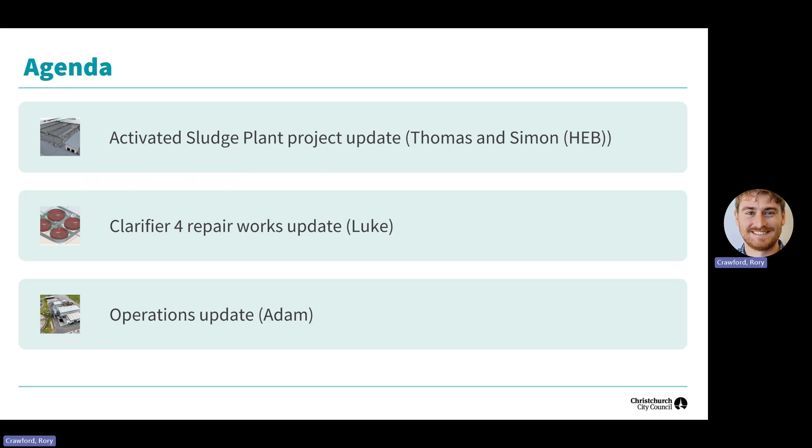Let's start. Today's agenda: I will present about the Activated Sludge Plant, then Luke, my colleague, will give an update on the clarifier works, and at the end Adam will give an update on the operation side. If you have any questions, you can ask during the presentation, but it might be better to wait until my presentation is finished, then ask us any questions you might have.

Now, as you know, we have our contractor awarded, and we've established a team who are actually managing the project on site over the next 3 years. It's great to see we have a fantastic team that will deliver a project for us that will be for a generation to come, and actually a legacy, leaving a legacy behind. You can see we've got HEB, our contractor, we've got AECOM, who is the designer and will still be involved in the background to help us answer questions. We've got Beca Steve from PLC as well, and he will do the construction management, monitoring and administration on site. And we've got Bond CM who are doing quantity survey in the background just to ensure we're staying in budget on the project.

Now, there was a question around what is actually an Activated Sludge Plant. A wastewater treatment plant - and Alan can answer that much better than me - is quite a complex system. It means you've got your primary system that actually takes all the grit and nitty-gritty stuff out. It also has primary settling tanks that take out the bed and that kind of stuff. Then we come to the secondary treatment, which is the Activated Sludge Plant. The trickling filter that burned down a few years ago was part of that secondary treatment step of the wastewater. In the end, what we're doing is replacing the trickling filter with newer technology. It's not the newest, but it is quite new technology, and it's quite common in the world - it's not something unknown, it's used everywhere around the world.

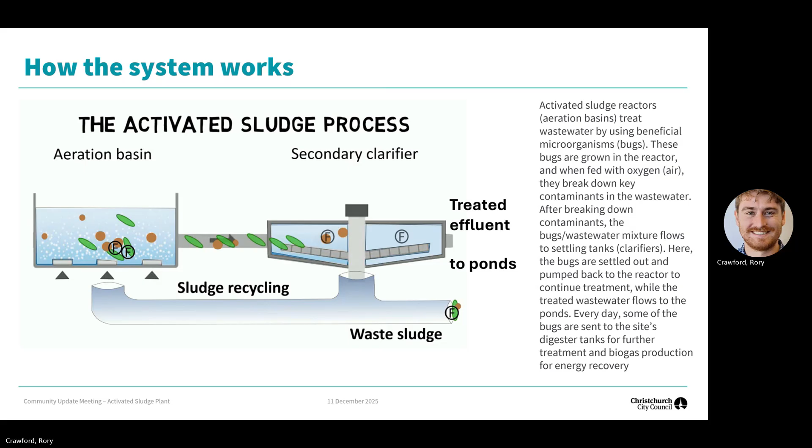So I think last time we met it was 6 or 7 months ago. Since then we have done quite a lot, though it doesn't look like it. We saw it quickly got demolished, and we achieved that by end of March, April.

Since then we have been busy in the background getting the design completed, which takes quite a bit of time for the complex design, and AECOM did a good job getting it done. All the final details have been established.

Also, as I mentioned, we've gone through the tender process. We went through 3 contractors and awarded the contract to HEB. This just happened a few weeks ago, great to have them on board.

And as I said, AECOM converted those drawings and specifications done for the design in a way that can now be handed to HEB. They're actually going to construct the plant over the next few years.

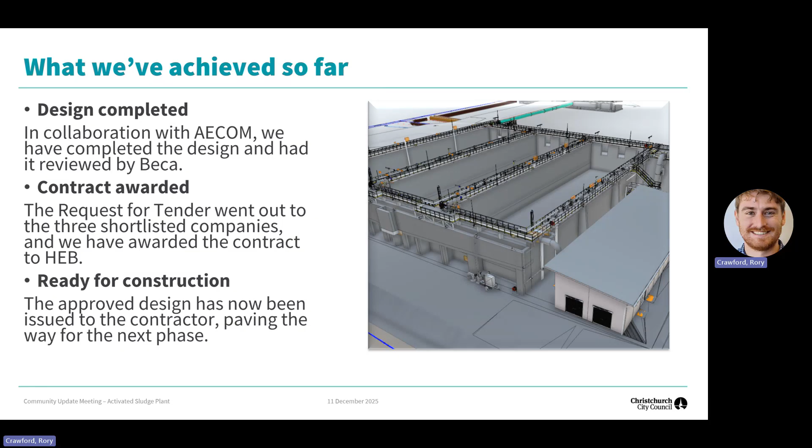Now, what is coming up? What you will see over the next year in January is actually the site handover. We're handing over that piece of land where the trickling filter was to HEB, and that is when they start setting everything up for construction.

The first thing you will see in the beginning, end of January, and actually early January, is the setup of the construction village. That will be placed right beside the boundary, where you saw that yard that was quite empty for the last couple of months, 2-3 months, where we've done a big tidy up. That is where the village will be placed.

Also by end of January, we will start the earthworks, taking a lot of soil away from the site and start to install the piles. That will take approximately 6 months before we actually see any activity happen on site with concrete going in.

One thing that happens there is a lot of piles going into the ground. How many piles are going in there? 1,200 something? 320. Sorry, yeah, it's got 1,400 piles. That is a lot of piles, 20 kilometers of piles, I think. That's just quite a lot. But Simon will talk a little bit more about that.

Then, as I said, construction will continue through 27. There's a lot of things happening during that, and then we will start commissioning by end of 27 through 28 of the new plant. After that we will start the transition from the temporary plant to the new plant, through to 29.

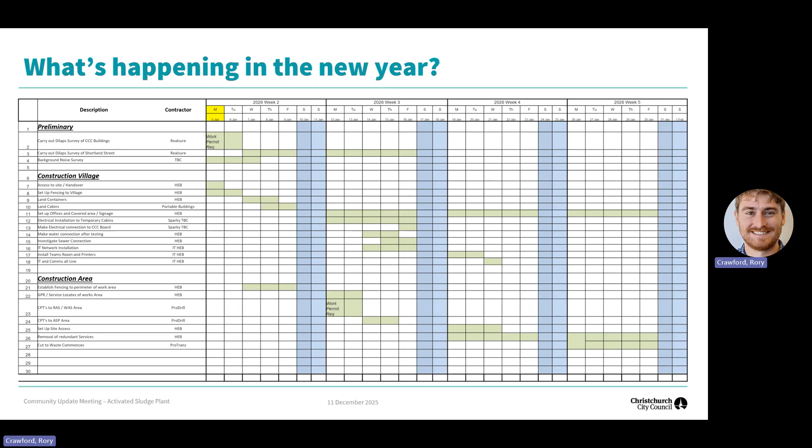We will always have an open line for you guys. If there's any concerns, our phone numbers and that kind of stuff will be available. That's what we will make sure. This is a major task behind you, you know that we need to look after you. Sorry to interrupt, thank you.

I hand over to Simon to go ahead. Okay, so to introduce myself, I'm Simon Potts, the project manager who's going to be responsible for overseeing construction of the new sludge plant. So I'm the face you'll see throughout the construction anyway.

Thomas has already kind of explained what's coming up next, but we've got a couple of slides to explain things in a bit more detail. So as Thomas said, the first thing is we are going to be setting up in that early part of January, and then that last week of January we're going to start preparing the site. If you can imagine, this is the site as it is at the moment. We're going to be doing a bit of earthworks in preparation for the ground improvement, and the ground improvement method of choice here is vibro stone columns.

So if you're familiar with them, basically it's a bored pile that is then reinforced with aggregates. It provides a good foundation and consolidation of the ground, in order to provide a good foundation for the structure that's going to be built on it. So those vibro stone columns, that's what's happening here.

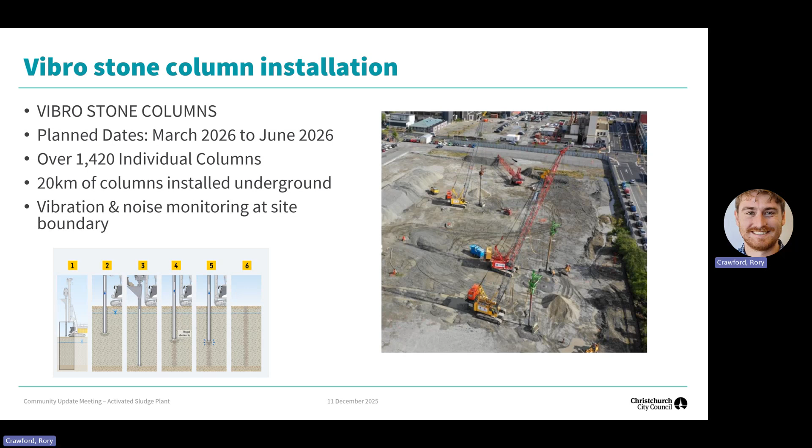How far is the vibration likely to travel? I'm predicting over the 170 metres to the fence line, the nearest property, it should be about 0.5 millimetres per second. It's hard to visualise what half a mil vibration looks like, but you can imagine a 10 centimetre ruler with a mil, that's kind of the amount of displacement, or half of that.

How frequent is it, the vibrations? It will be, I guess, for the duration of the project, so as long as we're installing columns. It's over the 3 month period that we'll be installing the stone columns, so not necessarily the frequency of the vibration.

So the frequency of the machine at startup you'll feel, and the machine actually operates at a frequency much higher than the resonant frequency of your soil. So it's really only the startup of the rig that you may feel something, and then it goes away.

It's a bit technical, but a lot of the consolidation of that soil happens at about 50 to 60 hertz, so unlikely to notice much. The machine doesn't operate at the natural frequency of the soil, but it does travel through that range at the start. You may feel it, but the intent is that for most of it, you'll just be hearing units that should be operating above the frequency of the soil.

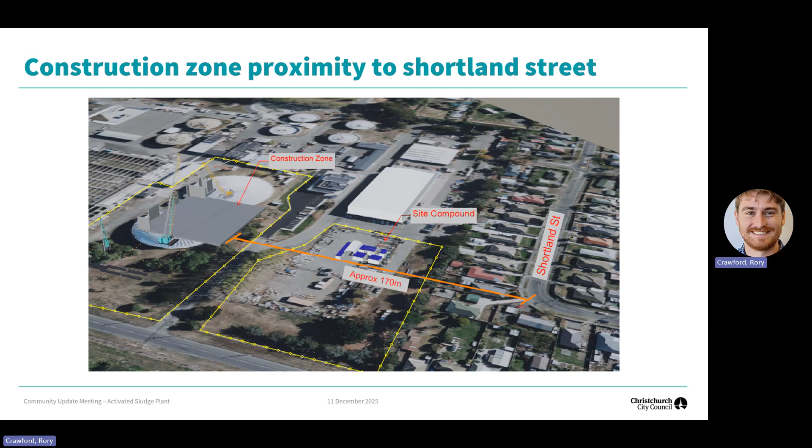Just play that. You happy to play it, Thomas? Do you want me just to play the video? Oh sorry, it's not in sequence here, but I can probably narrate this as it happens anyway.

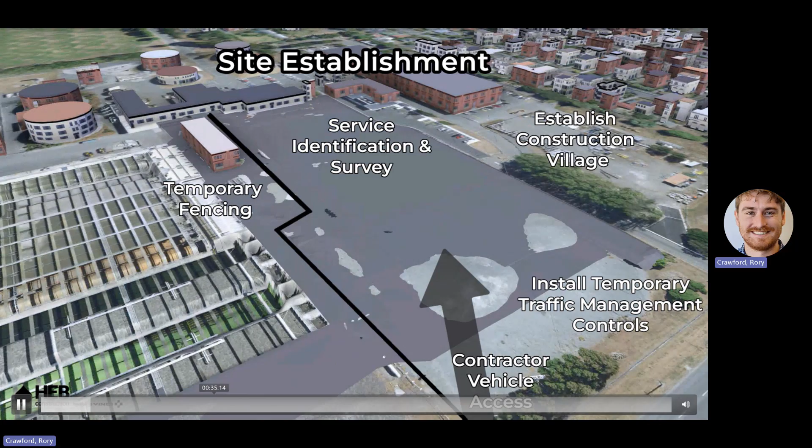So it's the construction area again, over the street, over the back here. This is a representation of the program as it's going to happen. The first thing that's happening, end of January, we've got the earthworks, and that will be a lot of cut to waste.

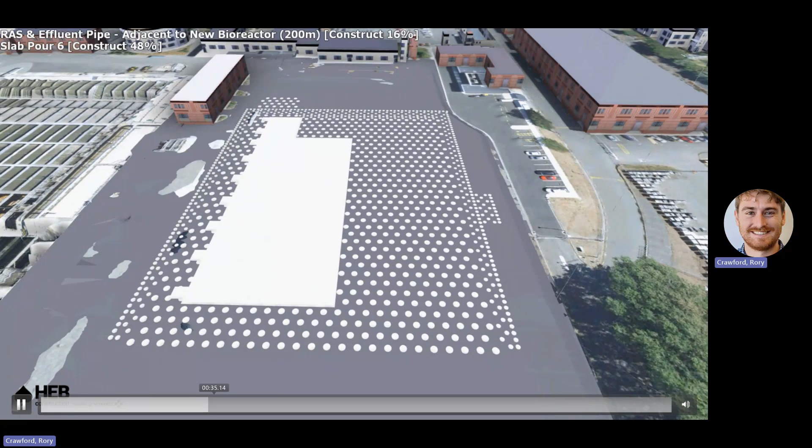Following from that are the stone columns that are going to be installed - that's 1,400 stone columns. That will be the ground improvement. Once we've got the ground improvement in place, we can start building the structure.

This is the base slabs for the structure and the walls going up - the concrete walls. Those walls are about 800 to 600 thick, a big concrete structure, 8 meters high - a big tank.

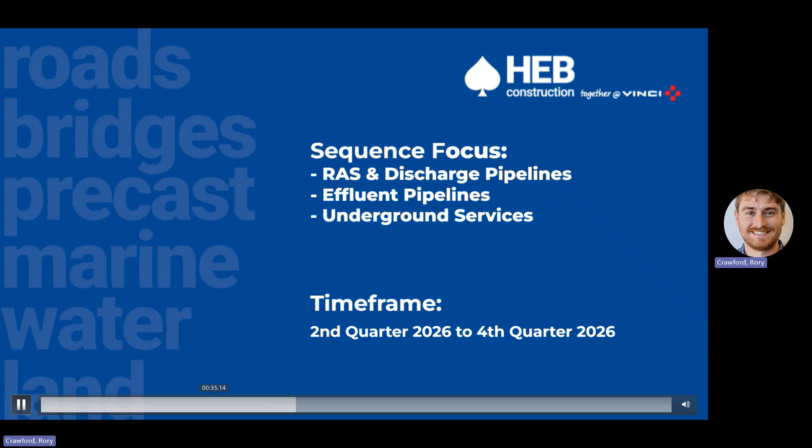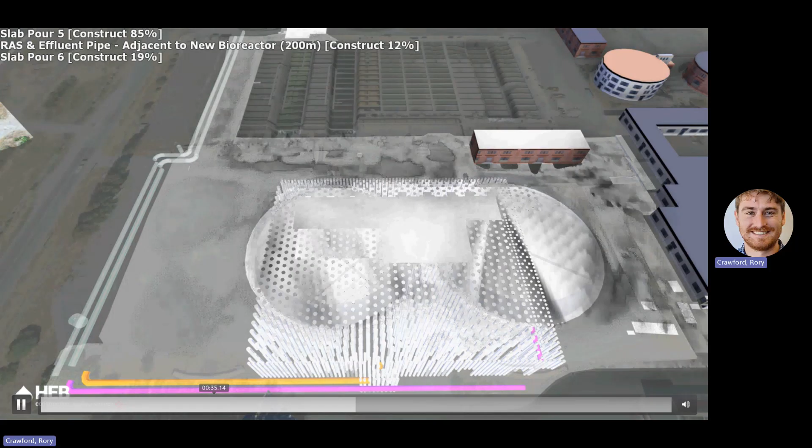Once we get to a point in the ground improvement around April, we're going to be installing some of the new pipe works - an effluent pipe and a sludge pipe, that's what's represented here. Those pipes will be installed around April, May time, and that all ties into the other part of the work - this is the sludge pump station.

Hopefully we can build it quick.

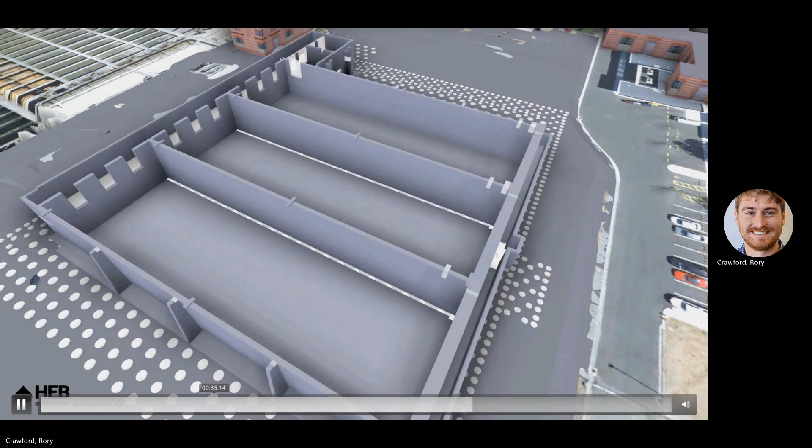To the north side of the building, that's where the mechanical part of the plant is going to be constructed. This is the new blower building, a concrete tilt slab building that will go up pretty quickly. That sits to the side of the plant.

Once we've got that structure complete, which is in the early part of '27, we'll start doing all the mechanical fit out. That's where we put all the aeration pipework and diffusers and everything into the tank, which is the process that Thomas talked about before.

Oh, is it the same one? Yeah, yeah, that's okay.

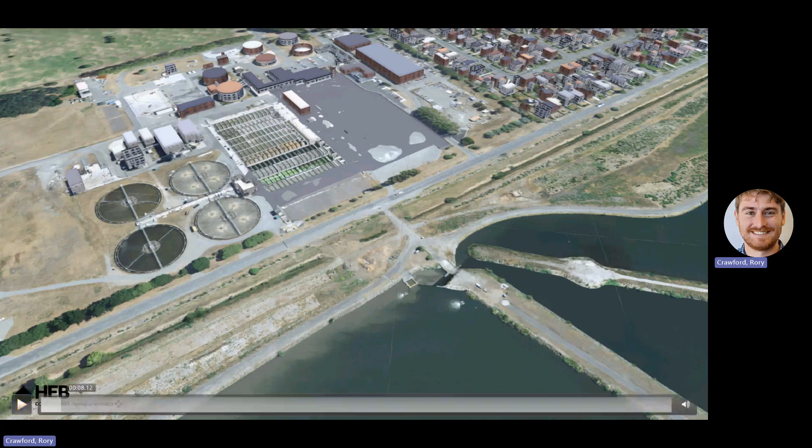So that's the end of our presentation for the project. Any questions? Myself, Sam, and also the team are willing to take some questions if you guys have any. I'm pretty sure more project questions will come out later, but we'll answer as much as we can now.

Question: you've been working 5, 6, or 7 days a week to build this? Yeah, so we'll be working 6 days a week, Monday through Saturday.

And what's the earliest start time you'll be on site? We start physical works at 7. The guys will turn up a little bit before that.

Thank you for the presentation. Is there any other noise that you're expecting? I live next to the container yard in Coastal, and it's not just the vibration of containers being dropped, but the beeping of machinery and engine whirs. One person came to council last week and said it was like torture. So just trying to understand what other noises people can expect from this site through construction, and how you mitigate or manage it.

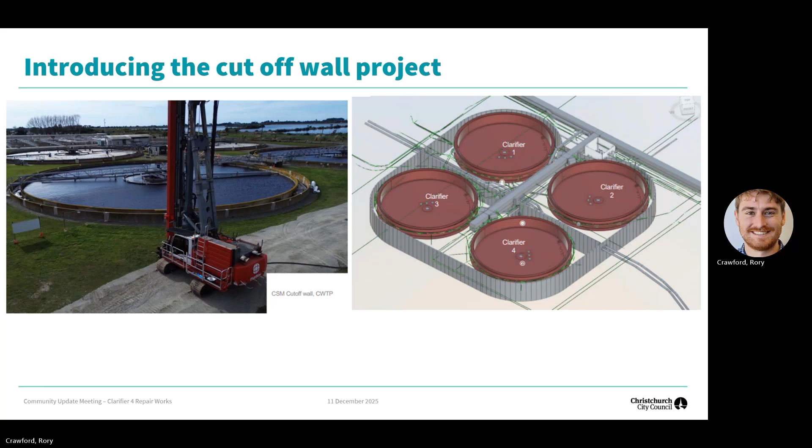This is a bit more detail of what this big machine does. We locate our services, send the machine there, it cuts in and injects, and repeats that for about 4 months. Pretty straightforward, nothing too exciting, not as cool as the activated sludge plant, but it's still going to provide us good risk management so we can protect our facilities out there.

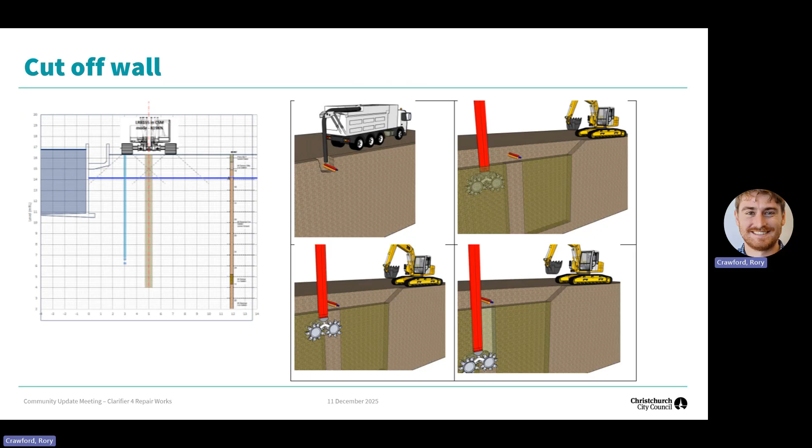From a timing perspective, we plan on getting started in January, probably doing the dewatering. Hopefully if things go smoothly we'll start in March, if not a bit later, April to May. The works are to prepare and site the clarifier. We haven't inspected it for about 15 years, so I'm not 100% sure how much work we need to do, but we're estimating probably 6 to 8 weeks to get that clarifier done, then put it all back together, fill it back up, and put it back into service. There will be a similar process for clarifier 3 at a later date.

So refreshing those units, is that going to take the smell away? What it'll do is help the efficiency of the clarifiers. Eventually, when the activated sludge plant is back in operation, the other 2 clarifiers that were converted to aeration basins will be converted back to clarifiers, which should help double our clarifying capacity and help with the odor issues.

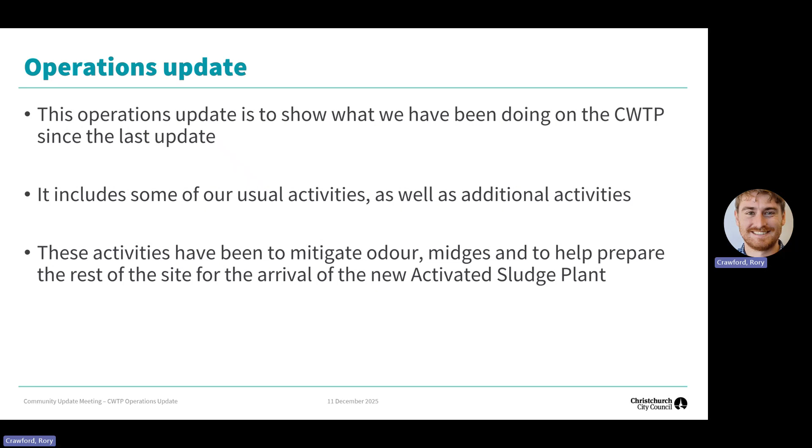What I'm just going to briefly run over is some of the activities that have happened here since our last meeting. Councillors on the community board will have seen some of this already from the last meeting we had here. So we still have the 5 community monitoring sites spread around.

This is where we monitor hydrogen sulfide in the community. Hydrogen sulfide can be detected by the human nose very, very well, and we use that as the indicator of where the odours are and how strong they are. We take the information from all those sites, collect it manually, analyse it overnight, and make it available on our website. We also look at the data to see if there's any way we can optimise and tweak the site to reduce the odours.

You're aware we've got 16 aerators on pond 1, which is a lot of heavy lifting for us. What we discovered last year was that pond 2 was also struggling at times. So what we've done is bought 3 more of these big disc aerators. They spin and move the flow around and also add oxygen into the pond, trying to get the oxygen level up and give it some circulation to try and reduce the odours. 2 are going to be installed in December and 1 in January.

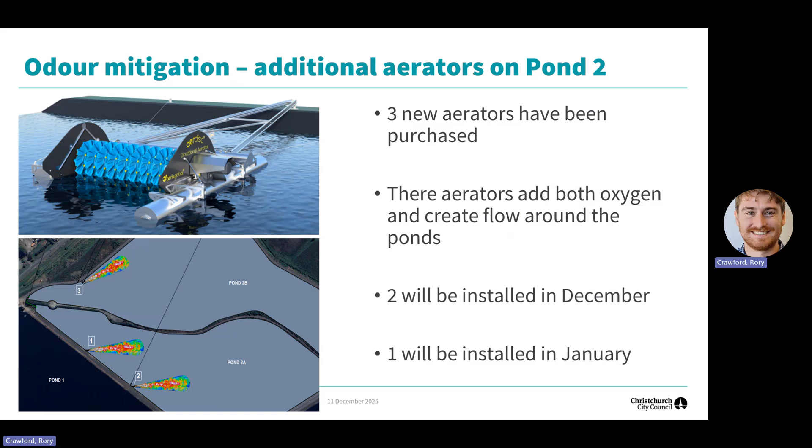The pond health, as you're well aware, varies over the time of year. Most of the time they're operating reasonably well, but at other times of the year they have struggles and generate their own odours. Staff do lots of different types of tests and checks on those, and that information allows us to make decisions on how to best operate the plants.

This is a sequence of 4 photographs taken in March, May, June and July, and we do use colour as one of the indicators, as John already noticed. As Lou said, during March we had the secondary activated sludge plant down at capacity, putting quite a bit of load into pond 1. Then as the seasons changed into winter, you can see pond 2 changed from a nice black colour to a real murky grey, and that's when it generated quite a bit of odours. You can see in June and July it took a while to get better.

Hence the decision to invest in those additional aerators to get there. The other thing as well is the ponds are a biological process. They vary with time, duration, seasons, load, flow. This is one of the discharge chambers, and as you can see, the biology has got a little bit funky. It starts causing these massive foams. It is natural, it's not detergents or anything that people have put through. It's just part of the complex biology of what's going on in the ponds.

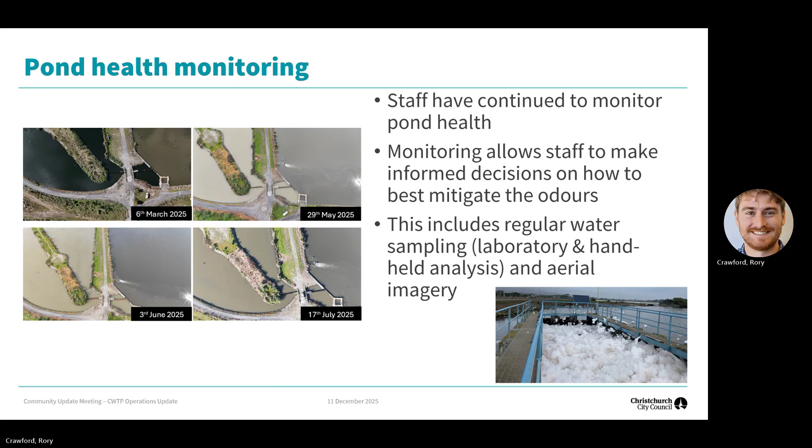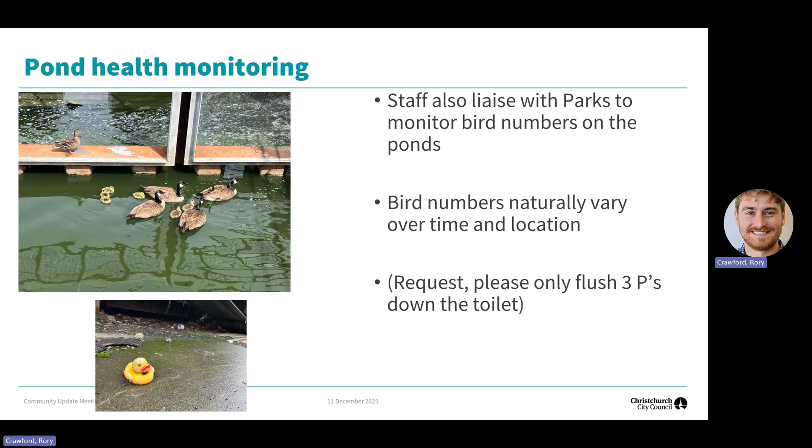Pond algae transfer pump. As you may have seen over the summer in particular, the ponds go a bit green. This again is purely natural biological process. If it's green, it's good because there's lots of algae there, growing and nurturing, which gives lots of oxygen to the pond, which is doing quite a bit of the biological work for us. So as you can see here, pond 1 when it comes in, it's a real light green. By the time it goes all the way through and comes to pond 2, it's a real dark green. So this is low algae, that's high algae. Algae doesn't swim against the current particularly well, so we just try and give it a boost. We put this algae transfer pump in pond 2, a tiny proportion of flow, to take some of that algae to flow into the head of pond 1, and it just acts like a seed and tries to encourage the algae to grow as much as possible.

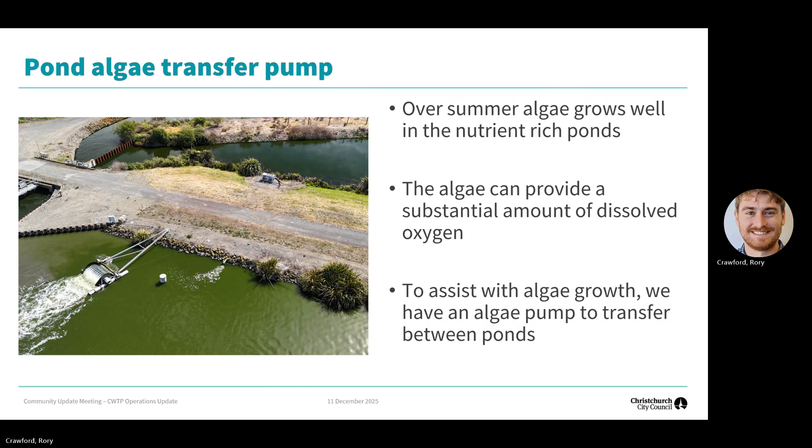Pond sludge surveys. Over time, ponds are big settlement tanks. The ponds are there, one of the reasons is to kill the E. coli that comes through the sewage treatment plant before it goes out to sea, so we have limits that we have to get below for E. coli, and the ponds do that for us. One of those methods is natural sedimentation. So over time, the ponds get sludge. With the loss of the trickling filters, we have been putting a lot of sludge in there, so we're very conscious of that. We do a lot of sludge monitoring to make sure that sludge levels don't build up too much.

Midge control. We do a number of midge control techniques. We vary the water quality through the ponds. One of the other ones that we do is the midge drag. Again, we use the same boat, drive it around. It holds great big floats across the back of it, a big bar, with chains that hang down with real big cords on it. We drag those chains through the sludge at the bottom of the pond.

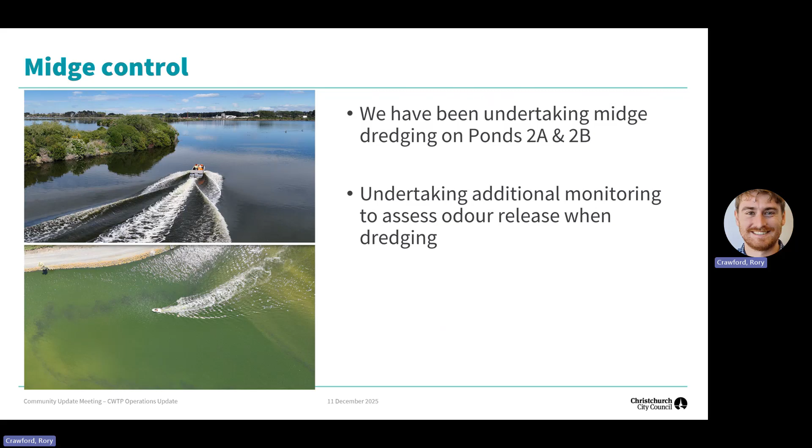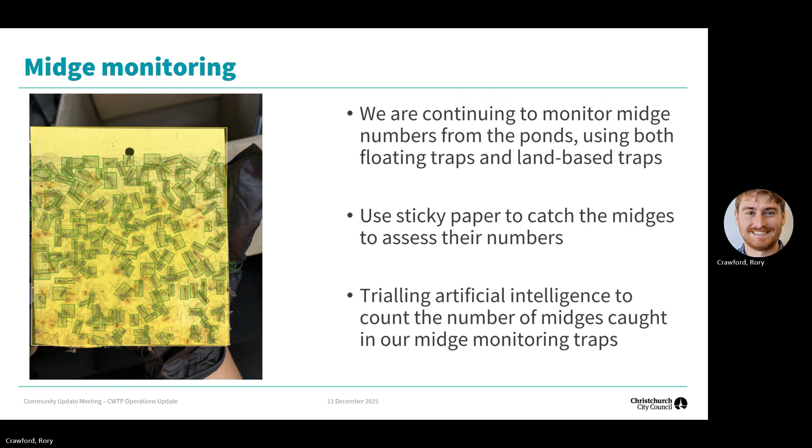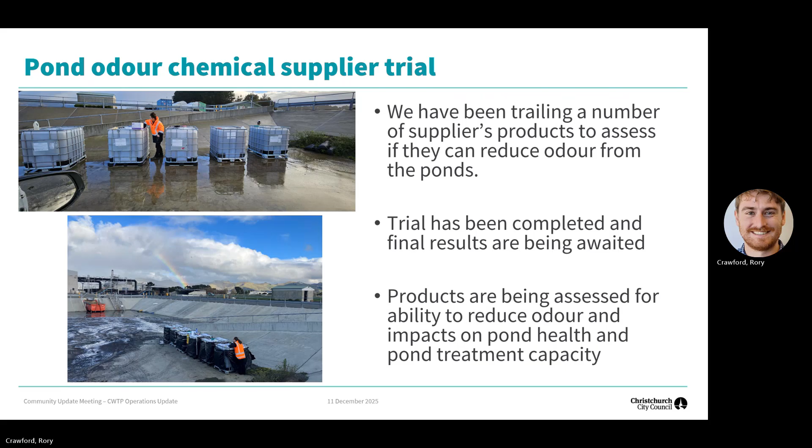Regarding the question that was asked before, I'll get clarification back with the chief secretary. One thing we are doing is looking at hydrogen sulfide. We've engaged Jacobs to do a full sweep all the way through the treatment plant. So next week, for a couple of days, we've got a couple of people from Jacobs, from Australia, taking samples - basically just running a little bottle - and they're going to test it to try and work out where the sulfur is at these chemical stages all the way through the treatment plant.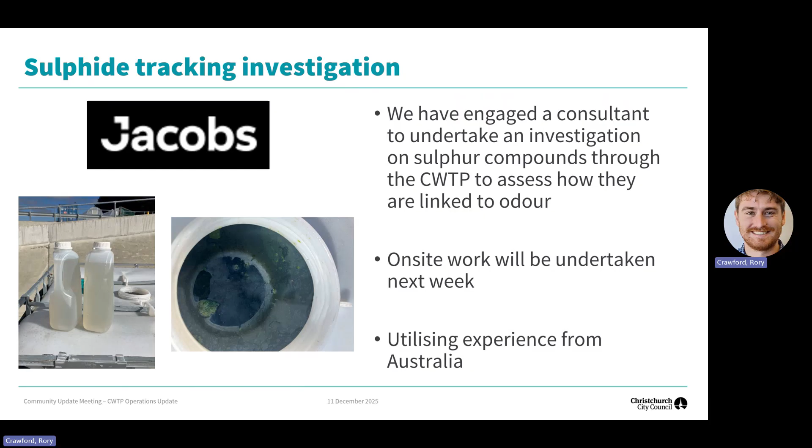What I've identified previously is that the primary tanks have been a bit of a source of odour. I'm just trying to understand how much of that is going to change when the activated sludge plant is gone. So with the plant in the state it's in at the moment, it's a good opportunity to get consultants in and go through that testing.

We've also been doing the usual bigger tasks. There's a whole load of tasks that we do daily, weekly, monthly, and some that we do on a one, two or three year basis. One of the things we've been doing is with our grit tanks - water from the sewers picks up little stones and sand, and we don't want those getting into our digesters and breaking our pumps. So we have a grit tank that you have to go and clean out periodically. That tank is about 7 metres deep, about 10 metres wide. We take it offline, drain it all the way out, and go in and clean it all out to make sure it's fit again.

We've got three of those tanks, just taking one offline at a time. So all the black stuff is the sand and grit that we're removing for effective downstream processes, and all the yellow blobs are waste material that sticks together and starts to mold.

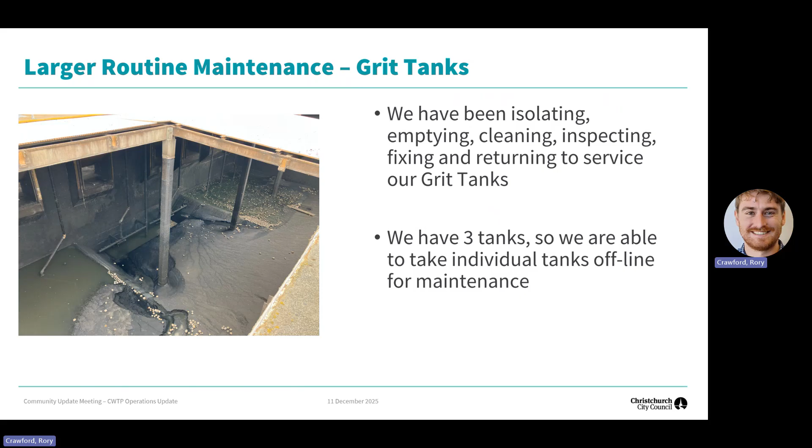Primary tanks - again, we've increased the rate at which we do maintenance on these. So we have 7 tanks, and we periodically take them offline, drain them out, clean them, and get in and do a bit of TLC work on them. As you can see here, 2 of the tanks are full, and here's 2 that are empty. That's my job, to do those repairs.

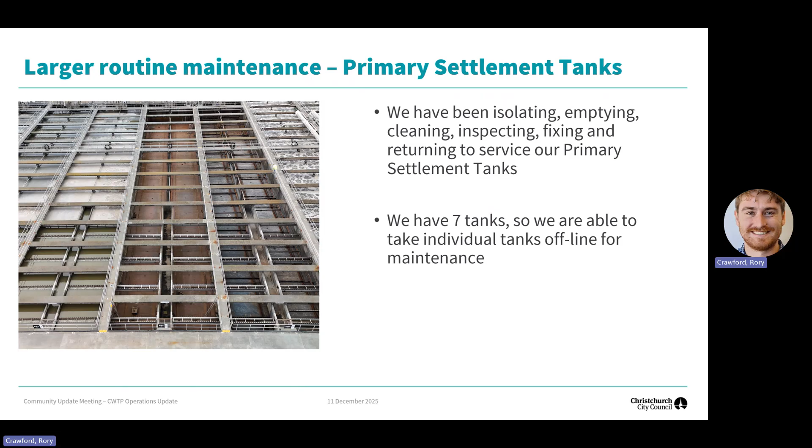Sludge dryer - with the sludge that comes out of the digesters, we put in 40 tons and get about 10 tons of solid out. Every now and again, you have to go in and do the nice job of giving it a clean out on the inside. So that all requires confined space entry.

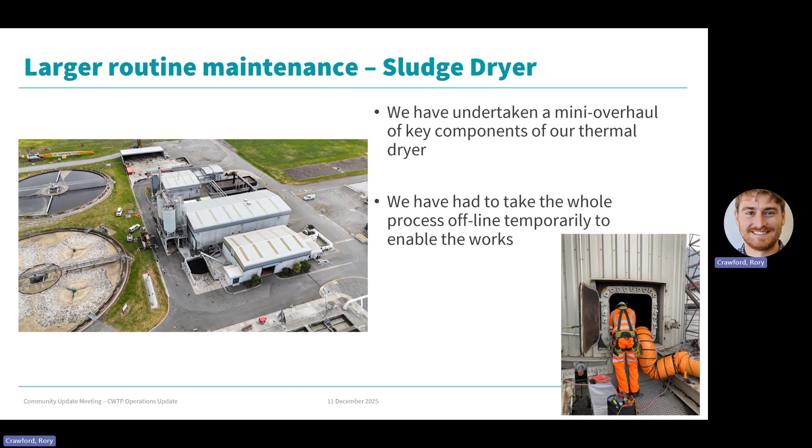Also doing all that, we're also running around making general health and safety improvements on site. I'm sure my contractors will be quite happy to discuss the health and safety improvements we can make. So we're doing additional health and safety signage, a bit more fencing improvements, handrails and railings, and also the day-to-day business - dealing with certification, the number of chemicals on site, the number of machinery on site, just to make sure the site stays as safe as possible.

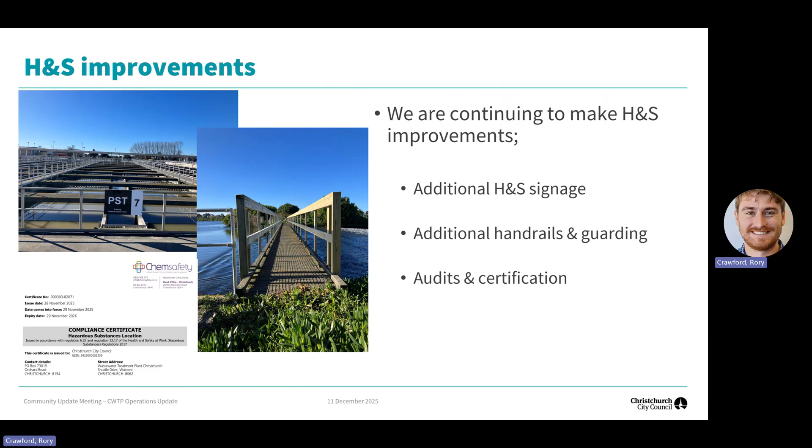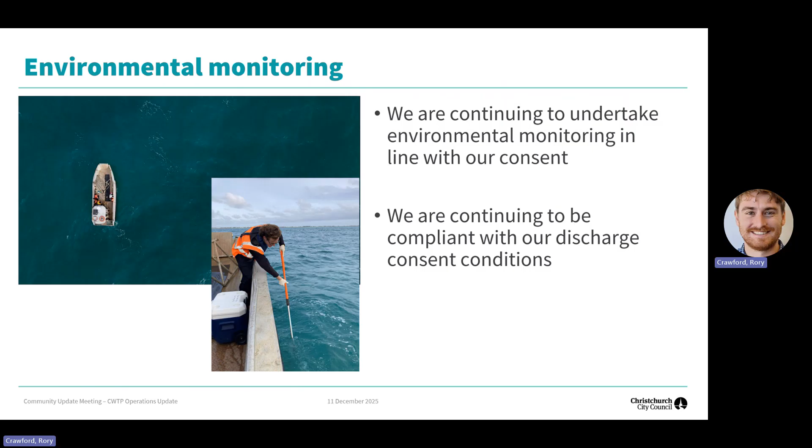So in summary, from myself, from an operational point of view, the staff will continue to monitor it and take activities as much as possible to mitigate issues. But the site is operating at maximum capacity. So to these guys, I'm just trying to...

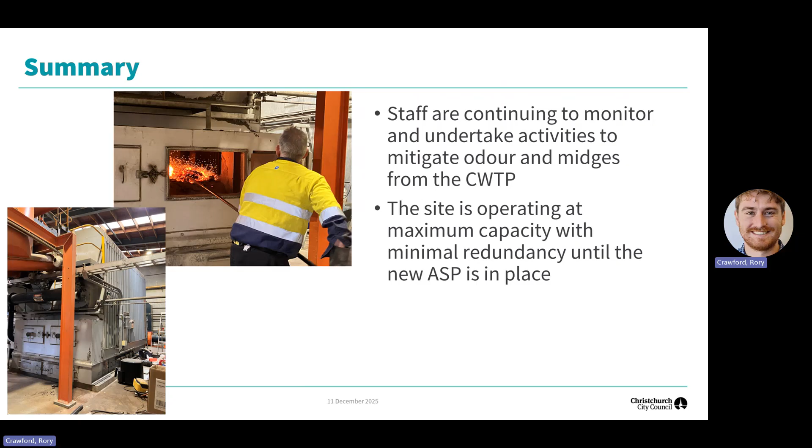So just to clarify, you can bring complaints about odor to either ECan or the city council? Yes. And we, as council, receive them as well. That's helpful when people do that when it's bad, so that you can...

Given that the odor's been there for the past 2 - 3 weeks, is there any chance of getting those additional aerators sooner rather than later?